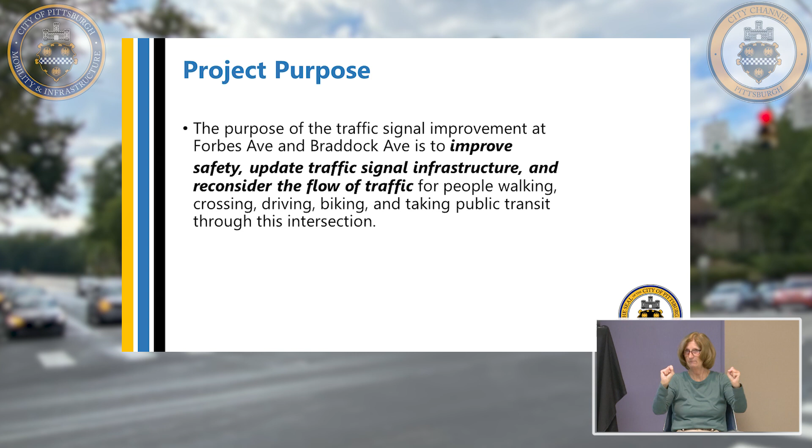The project purpose is to make improvements to the Forbes Avenue, Braddock Avenue intersection, and the focus is safety. We'll be updating the traffic signal infrastructure, and we will be reconsidering the flow of traffic through this intersection, and the way it is a key connection to the rest of the city for this neighborhood.

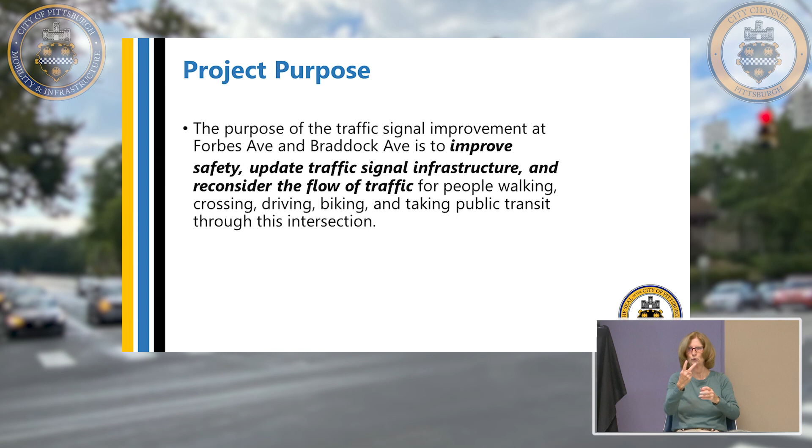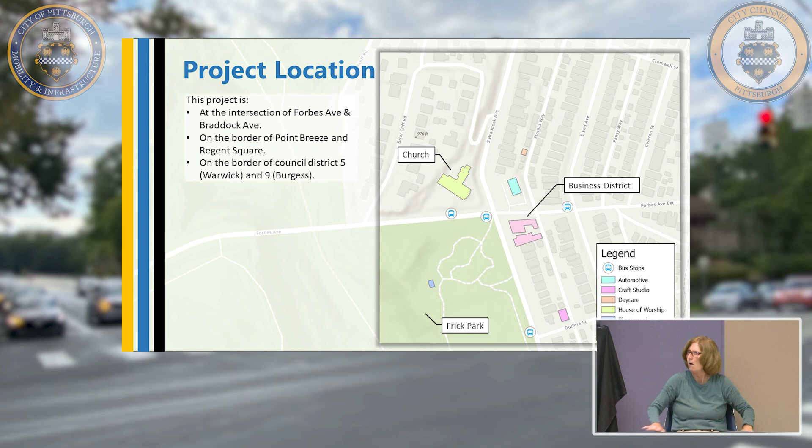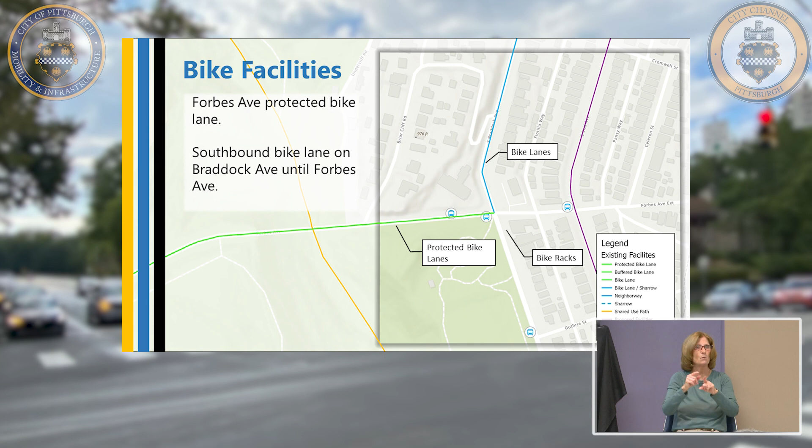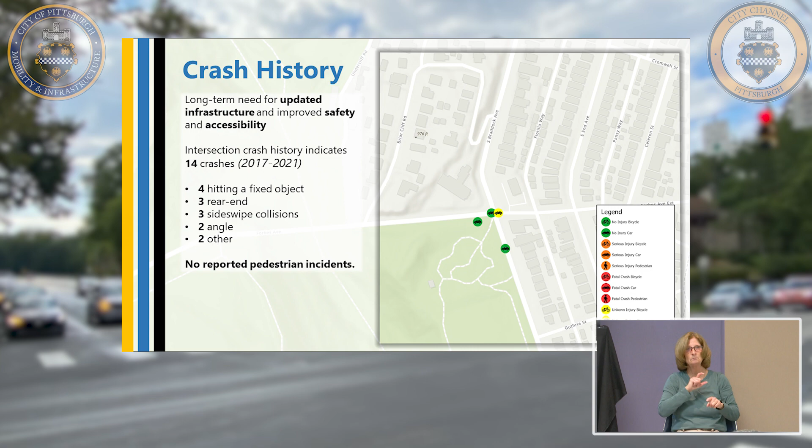Next, I'm going to talk a little bit about the background and schedule of this project. The funding is an 80-20 split between a grant, the Green Light Go grant, and the total project cost is $589,000. In December 2021, we submitted for the PennDOT Green Light Go grant. In the summer of '22, we were awarded the grant.

In September of '23, that's where we are now, we're having our first public meeting. In January of next year, the final design will be posted on our Engage page. We'll have a link to that later that you guys can follow this project on. Construction will begin in the summer of '24, and this project will be completed in the winter of '24.

And with that, I'm going to pass off to Lila to get into the engineering details. Hi everyone, as Jeff said, I am the project manager on this project.

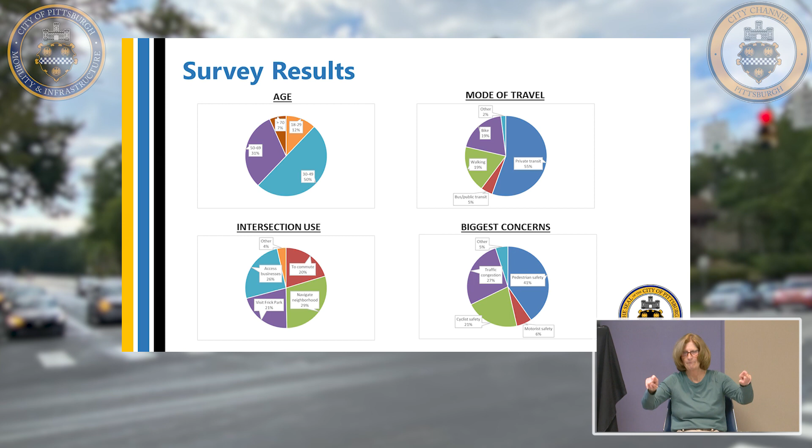To start, I'm going to go over some survey results. We had a survey posted on our Engage page, with over 250 respondents as of this morning. You can see that we have a nice variety of age. We asked respondents about their primary mode of travel through the intersection: about half are private transit, and the other half dispersed between biking, walking, public transit, and other.

As far as intersection use, we asked people why they primarily use the intersection. We had a good variety between accessing local businesses, commuting to work or school, visiting nearby Frick Park, or navigating the neighborhood. We also asked about the biggest concerns, and the three main concerns we saw were pedestrian safety, traffic congestion, and cyclist safety. We hope to address all of those concerns.

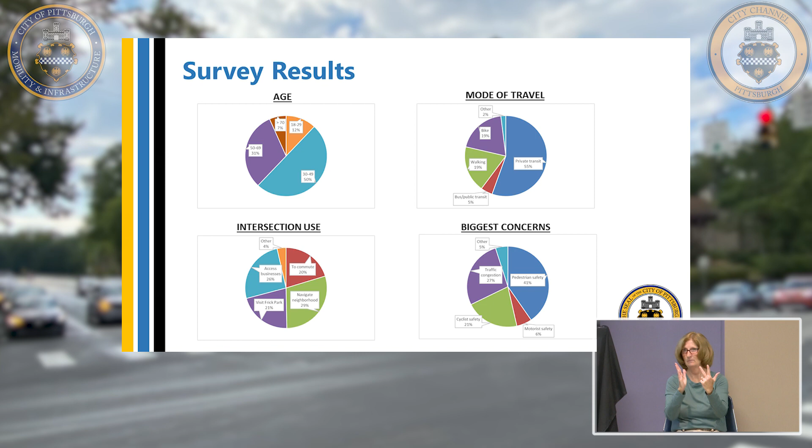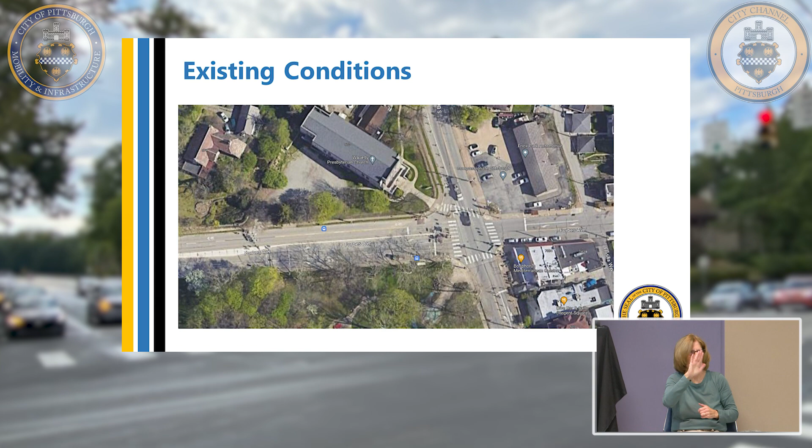And yeah, I think you all know the intersection. So now we will go ahead and talk about some design treatments and updates before we get into the proposed alternative. So we are going to improve the intersection layout. We are going to provide intersection bump outs to reduce the pedestrian crossing distances. And we are also adding detection for all approaches to improve the traffic flow.

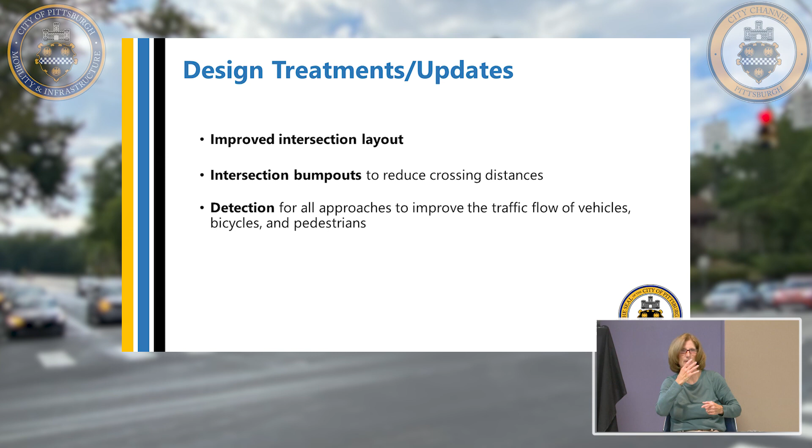This is a very rough sketch of a proposed design. And so I'm going to talk about a few main points. There are 3 major changes that we're proposing. The first is this lane transition and a bike bump out on the Forbes Avenue eastbound approach. So that will connect the existing shared use path that was recently completed to the intersection and make an exclusive bike connection there. And in order to do that, we are shifting over these lanes. And so there will not be a receiving lane on this end because of change 2.

So we're removing the island in the northwest corner. It is a major safety concern. In general, we try to get rid of those islands as much as possible. And then the third change is the change in the lane configuration on Braddock Avenue southbound approach. There is a right turn lane here currently. We are proposing to remove that right turn lane and extend the bike lane that ends a bit back from the intersection to complete this bicycle connection.

And then we are proposing removing the left turn from this lane here. So with our traffic counts, there are very low volumes on that left turn, a couple cars an hour. And so removing that option would improve the flow of traffic through the intersection. The route around isn't too much. Okay, and we will have questions at the end.

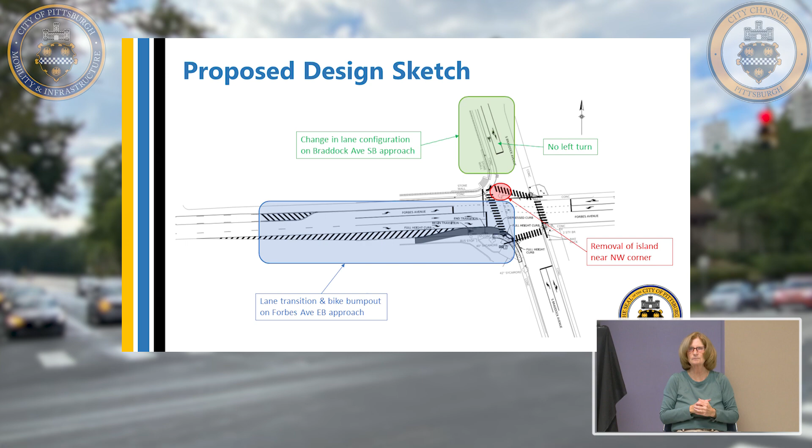So now I'll get into a little bit of the technical detail. This is kind of difficult to explain, but I will do my best. So we are looking at the average travel delay here, and this is in minutes. So the no-build column is showing you what the current delay is, and this is with the traffic. There's a model that's created, and it spits out these numbers, so there's a lot that goes into it. But the no-build is the current delay that you see, and that's the average user delay. We have the AM peak period, the PM peak period, and then the midday peak period, which gives a better representation of most of the day.

And then when you go to the proposed, our proposed alternative assumes that the pedestrian push button is pressed somewhere between 0 and 75% of the time. So that's why you see a range there, because if it's pressed more, then you'll have more of a delay because you're waiting for the pedestrian phase. So that's the range of the proposed, and then we show the difference to give a better understanding of what we're looking at here. You can see in most of the cases, we're decreasing the delay.

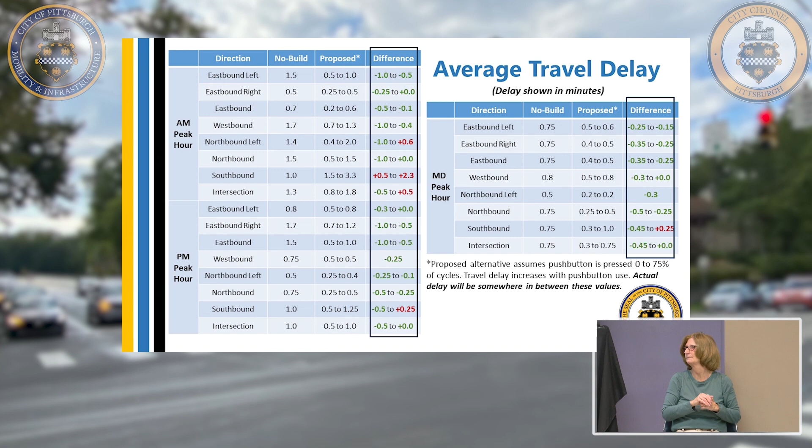There's one place in particular that does increase the delay more than our usual standard, and that is the southbound approach in the AM peak period. It's the 0.5 to 2.3, but that is once again just the AM peak period, and when you look at the midday, it gives more of an idea for 20 of the 24 hours. So just a quick summary of our changes. We're going to upgrade all the traffic signal infrastructure and then improve safety and traffic flow with a revised intersection layout, bump outs, and added detection.

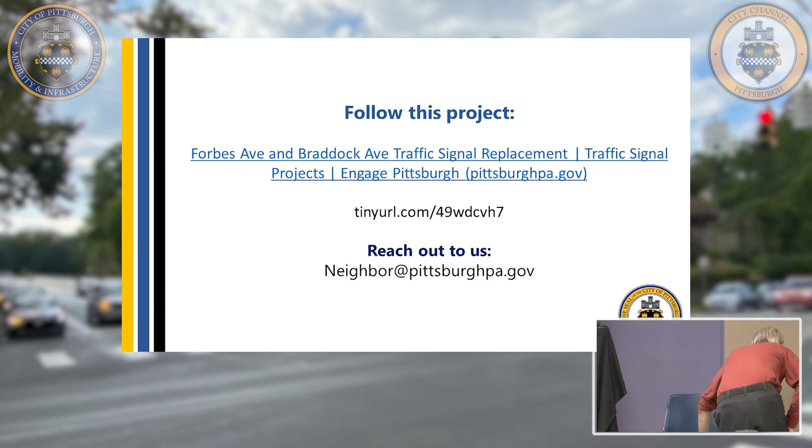Yes, sir. Yes, thank you. My name is Francis. I'm a resident. We walked over tonight, as Layla said. I just wanted to ask one question regarding when you're going east on Forbes, you come down to the intersection and the right turn is made. I noticed that one large tree has been cut and removed from the corner of the intersection.

I was wondering if there was any thought given to restricting parking in that area from the corner of the intersection up to, say, where the fire hydrant is located. So that's my question. Could there be a consideration of restricting parking for that brief length of street from the corner to the fire hydrant? I've noticed many times when there are a lot of people in the park, the buses really can't make the turn, and I actually was involved in an accident with one.

Yeah, could you? Yeah. I have never been in a public meeting before where someone wants to restrict parking.

Well, that's my comment. That's all I have. Thank you. Thank you very much. I fully agree. Give me 1 second if I could. We'll look into it. Just to be clear, you're talking about a right turn from eastbound Forbes Avenue onto southbound Braddock. You are suggesting increasing the no parking zone further south, towards leaving the city, to make that turning movement better. Yes. It's a great comment. We'll look into it. Yes.

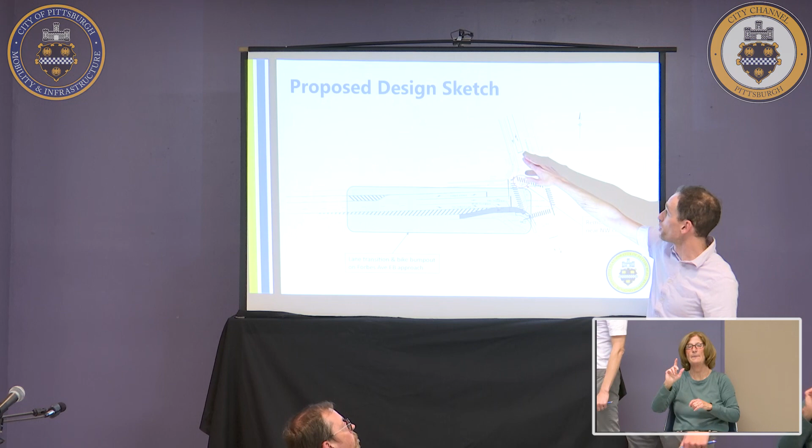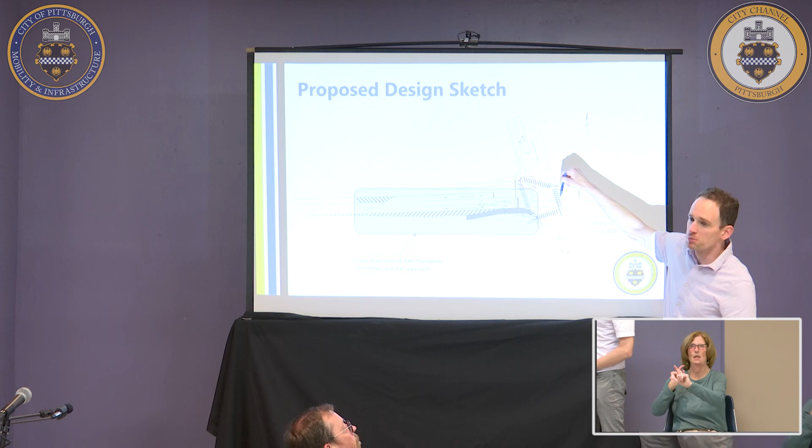This lane right here today has 2 lanes. It has a right turn only lane and it has a left straight lane. We are proposing extending this bike lane to the intersection and combining it into one single lane of traffic. I can't draw on this, but this left turn would be prohibited. There would be signs restricting that left turn. The primary reason is that our traffic counts indicated there were fewer than 10 cars in a peak hour period that make that turn.

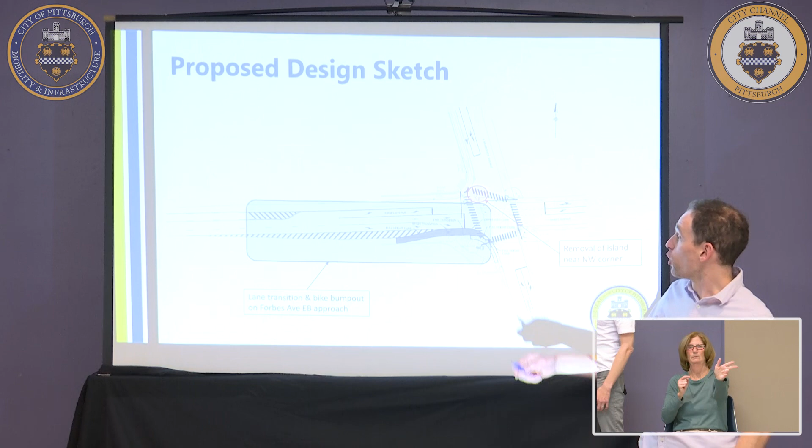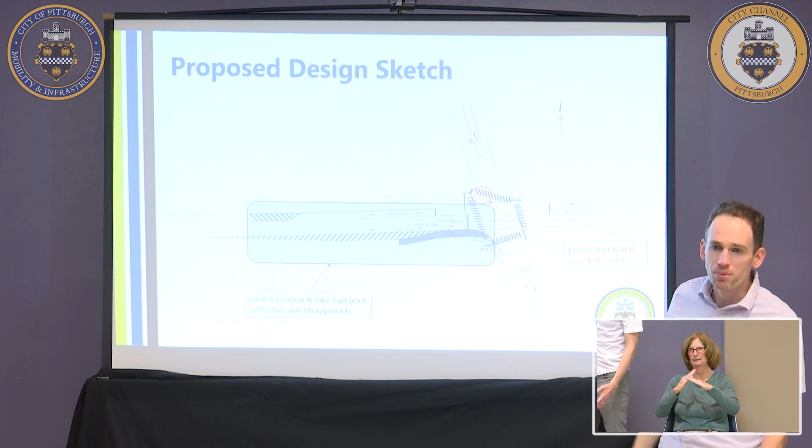You're correctly pointing out that there are blockages when you remove lanes. For those 10 cars that come down here an hour, I don't want them blocking a single lane of traffic. That's why. Does that make sense? That makes sense. Thank you. Can I ask you a question since you're up there? Please. Sure.

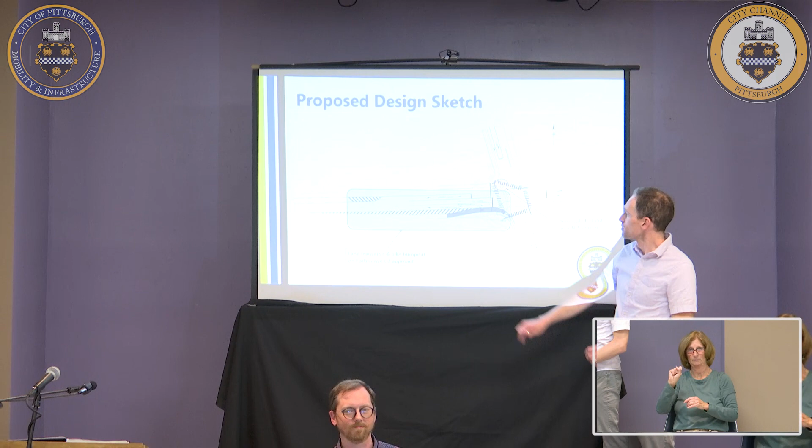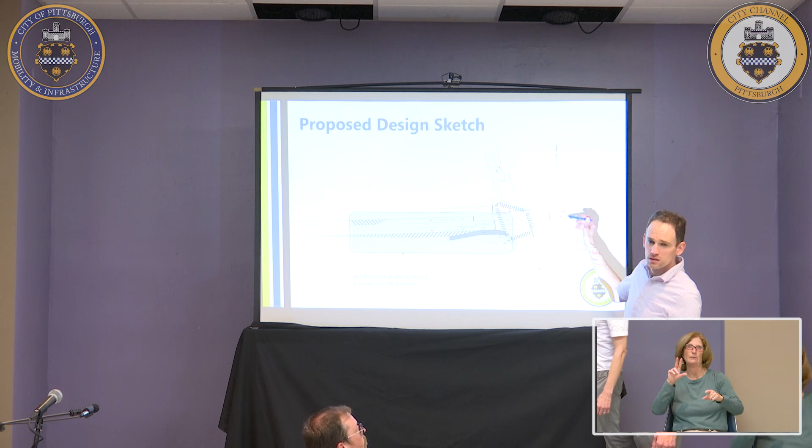Okay, if I'm coming up Forbes to make a left turn, from that direction, to make a left turn onto Braddock. Yes. I know you talked about the lights on the other side, the no turn on red, but they do get an arrow. And so as a result, cars coming this way on Forbes do not stop. And if you're making that left turn, is there any way to get a left turn signal?

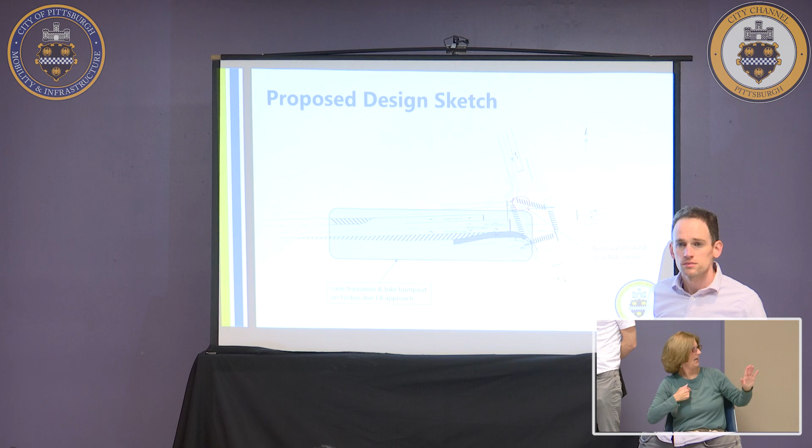That, I did discuss that briefly with John. I'm leaning towards doing that. Because when the bridge was gone, we all got used to going that way. Sure. And it's like, why do I have to go all the way down East End Avenue to get onto the Parkway, whereas I could go up and make a left turn? Because I live right near there.

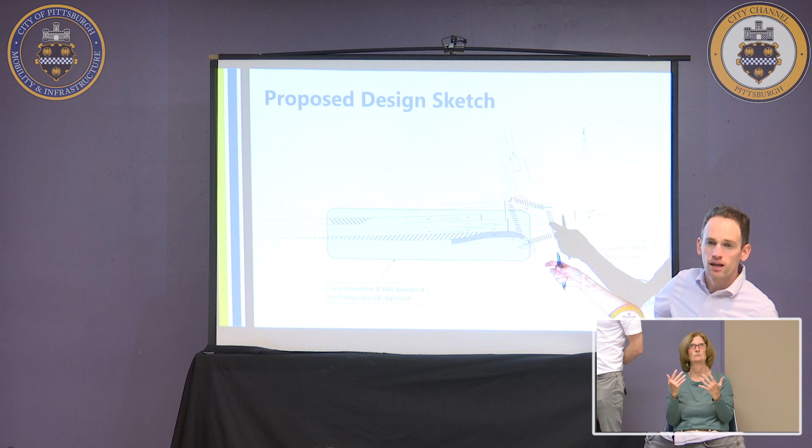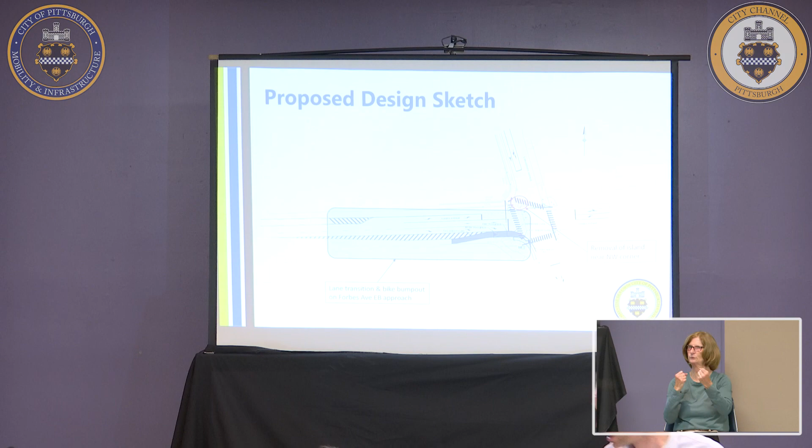The trade-offs are it adds delay for everybody, but it's a small amount of delay. Right. And you can do it such that it's at the end of the cycle, so you would wait there for the whole time your green ball is showing. If you're still stuck there, there'd be detection that would pick you up, give you a left turn. That would be great. Don't consider this a promise, but I'm very strong. That would be helpful. When you say detection, is that like a sensor? Yes. Yeah, sensor.

If I get sidetracked, you gotta keep me in line. Let's try and focus on the questions over here, and then we'll circle back at the end. I'm seeing the line stop building, so maybe once everybody asks their questions there, we can take questions from the audience. Yeah, I'll try to be brief.

Yes. First of all, when I'm coming home from the Parkway and I hang that left onto East End Avenue, there is always a car parked at the corner. It is so dangerous. It's usually parked at the fire plug. There's already a fire plug there. Yeah, right there. Who has that laser pointer? They did good. Yeah, right there. Like when you swing from Braddock Avenue onto East End into the neighborhood, there's always a car. It's illegally parked. You mean on the Forbes? Onto Forbes headed to East End.

Okay. We need those holy things. You know those? Or something to stop people from parking. They're not going to obey. They are not obeying the fire plug. I hear you. So whatever it takes to protect that fire plug and that corner seems necessary to protect the businesses there, the access to everything. It is illegal. It should be illegal, but people are ignoring it.

That whole corridor on that little chunk of Forbes is a disaster of illegal parking all the time. The police don't know we're down here, and there are cars parked in the gas station, up on the sidewalk. If you were in a wheelchair, you wouldn't be able to get down that sidewalk half the time for a car parked on the sidewalk. So I don't know what you can do about illegal parking in that corridor, but tickets would be beautiful, just something.

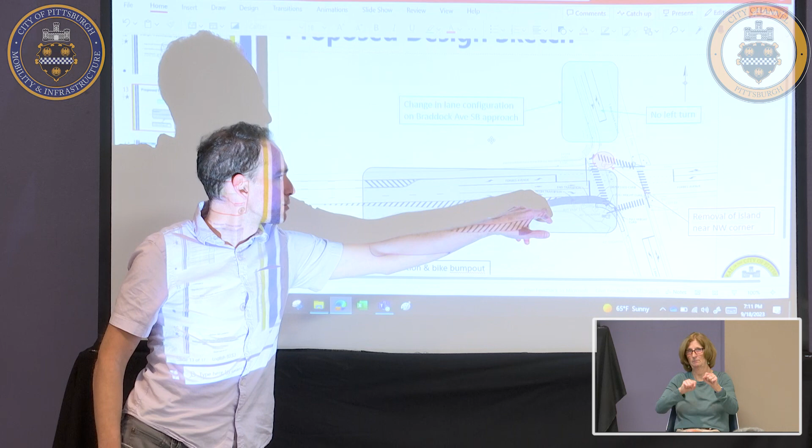Eastbound bikes, we don't know the particulars because this is a very early concept. We want to use some of the space in Forbes Avenue that's currently a right turn lane to allow bikes to go around those 2 or 3 trees that are right here, and then queue somewhere over here where they wait for a dedicated bike signal. And would that include, if I wanted to make a left onto Braddock, would that dedicated bike signal help me? No one's moving but the bikes. Say that again? No one's moving but the bikes. Awesome. Yeah, it's exclusive.

Quickly, 2 things. The first is that this isn't a businesses versus residents conversation, my corridor is all businesses. I mean, Ronnie and I don't think of ourselves that way, but we're landlords. I am a business. So the safety of my tenants and the accessibility and the livability of the neighborhood is my bread and butter. You are building me money. So I thank you for that. Could you say that again? You are building me money. For my grandchildren, whatever, I'm old now, but the safety at the corner is part of my bread and butter, and many of us are businesses. So we may have different priorities as businesses, but I don't want to be dismissed as just a resident versus business. I am business. It's not happening. Okay, well, all right. I'm not easily dismissed either.

The other thing is the timing of your project. How does it correlate to our next nightmare when they close the bridge on the Parkway, when the Commercial Street Bridge is closed, and all of that traffic is routed through our neighborhood? We'll be in and out well before that. Oh, thank you, Jesus. No, I don't usually do public meetings for signal projects. Usually they're replaced in kind. This is a 3 to 4 month job. It's a 3 to 4 month disruption. So I get your concern. That's years away.

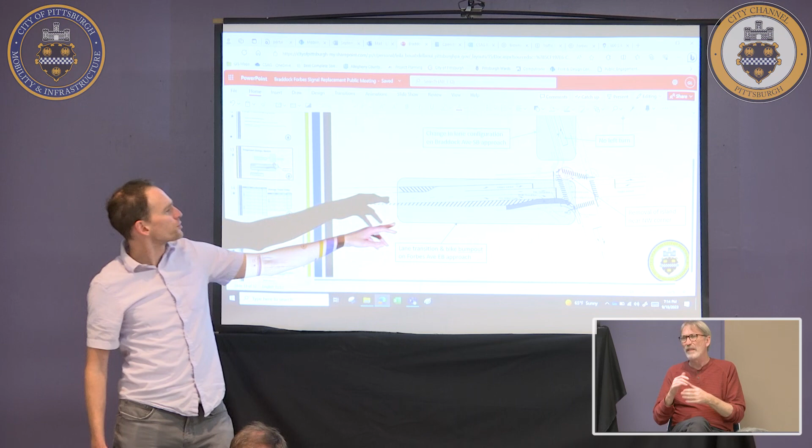And that leads to a change in congestion too, of course. There's the other removal of the lane on Forbes. That I'm not as concerned about because that's a receiving lane. When you get congestion, it's your lanes approaching the signal, not leaving them, in almost all cases. So the lane in front of the church on Braddock Avenue to turn up Forbes is going away. Correct. Okay, so I think the busiest time for that lane is in the morning, when the morning commuters know what they're doing, and the people on Braddock Avenue turning left onto Forbes. Right.

Left onto Forbes, coming from Regent Square, from the Parkway, turning left, can work compatibly with people coming from Penn Avenue. So there's two people, they both know they have their lane, the left-hand people can turn and the right-hand people can turn simultaneously.

What's going to happen when that lane goes away and two people are trying to turn at rush hour in the morning? That's a great question. I'm very against anything that has two turning movements sharing a space from a safety standpoint, and it leads to increased congestion. Unless it's like the Sawmill Run Boulevards of the world, West Liberty Avenues, I have zero desire to have a left turn and a right turn go at the same time and then enter their respective lanes. It helps congestion, but I do not care for that in any capacity in a neighborhood.